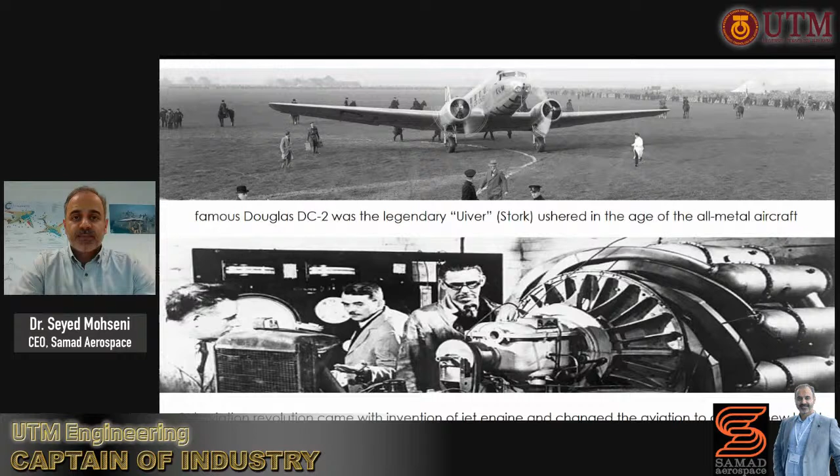The second aviation revolution enabled a lot of airlines to make use of the jet engine, or turbofan engines were installed on the passenger aircraft, and still up to this day, almost all of the passenger aircraft that we are using in the aviation industry run on gas turbine, and it's one of the key prime movers within the aviation industry. But the third aviation revolution is emerging, and it has already started to happen now with hybrid, electric, and also VTOL aircraft.

Some of the enabling technologies have allowed these products to be developed and also move into certification and manufacturing, then later on coming to the market. So there are three key technologies that have been used to allow these products to be developed. One is electric motors using permanent magnet technologies, with significantly higher power to weight ratio. Also battery technologies, with significant investment that major companies and also governments have made into the development of the new batteries.

And third are the IT and connected autonomous technologies that are allowing more advanced flight control systems and more advanced methodologies for flying an aircraft, at the same time that this is happening in the automotive industry as well. Today, I want to bring your focus on some of the underlying factors that need to be looked at if we want to see this industry flourishing. And these might not, in the first instance, look to be particularly on the product, but it's more on the environment of the future of flight.

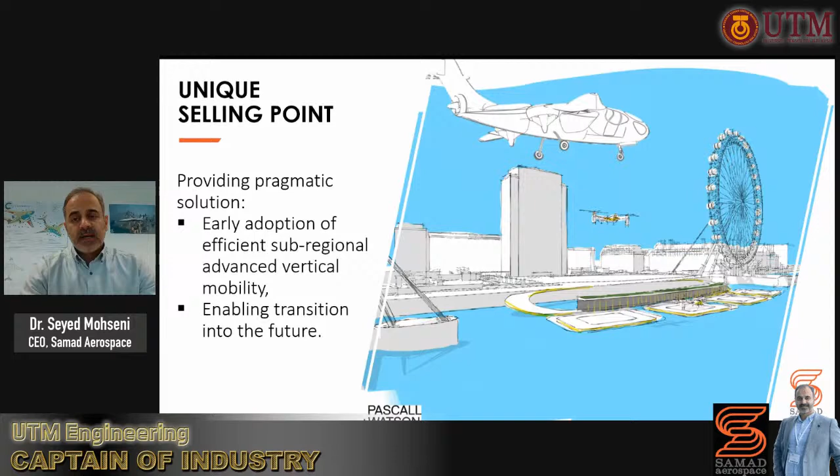In this particular topic, we are focusing on a pragmatic solution. What is the early adoption of an efficient sub-regional advanced vertical takeoff and landing aircraft? And what is the enabling transition into the future? Because we have an existing infrastructure, existing factors that all have to work together to allow the current aircraft to work. We want to bring a new type of aircraft to the market, and how would this new type of aircraft come into the aviation environment?

If we take one segment of this particular market, which is intercity transport, and this in particular is the focus of Samad Aerospace with its hybrid electric VTOL aircraft. If you think about short-haul flights, there are hundreds of flights in the countries. I'm sure in Malaysia it is the same, in the UK and different European countries. And there are a lot of flights where the duration of the flight is less than an hour, but the total time spent for that journey is more than 3 hours. And the reason is the time that we spend going to the airport and coming out of the airport.

The other point is there are certain routes that are very difficult, and there is no existing air transport that could be used by people. As an example, Cardiff to Manchester in the UK. Typically, it takes 3.5 hours of driving by car. There is no existing flight route for the 188-mile journey. The same journey can be done using the e-Starling aircraft for city-to-city transport with about half an hour to 45 minutes of flight. So significant time saving can be achieved, and therefore increased productivity for premium level travelers, which on its own can benefit the environment at large.

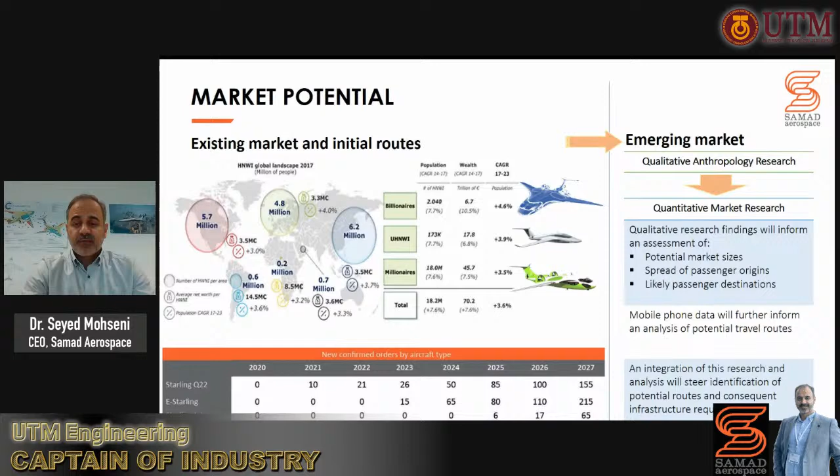That's the initial market. But the emerging market needs to be looked at, and this is again another topic where we would be interested to see how universities and other companies could get involved to provide valuable data for us. The particular data that we would be interested in is to find out where VTOL aircraft could operate currently in the countries using existing VTOL vehicles like helicopters.

What are the sub-regional airline opportunities that could be looked at here for a 5-seater aircraft? And what is the frequency of these flights? How often can we rely on the air routes? In particular, the suggested method is to look into traditional historical analysis, understanding the routes and frequency of these air routes. How can we financially make sense of using the existing routes?

And then the next step, we would be interested to look into the data that is publicly available through the CAA of different countries, so that we can find out the profile of the passengers, the type of profiles of the passengers, and also understand the originations of the journeys before they come to the airport.

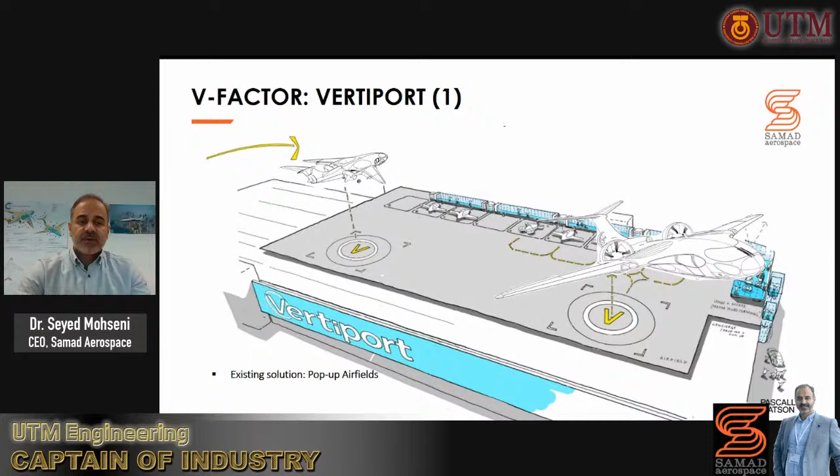Vertiports are very, very important, and the economics of vertiports are also important, because if we want to have a thriving electric VTOL air transport system, we need to have the correct infrastructure in place. And the economics of vertiports are important because there would be companies running vertiports similar to the companies running airports. And therefore, the study on how many flights would make sense for a typical size of vertiport, and where we could put these vertiports.

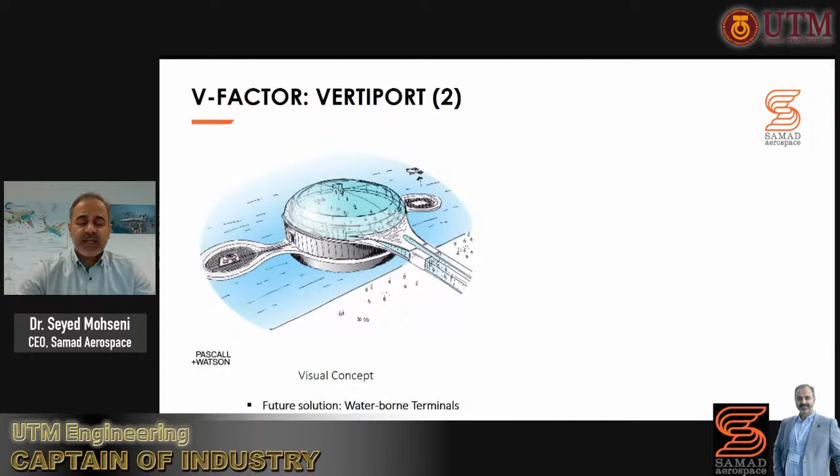We have done some conceptual work with Pascall and Watson, looking into different designs of vertiports. How can they be integrated with existing systems, how practical they would be from the planning permission side, and what are the types of vertiports that we could have based on the city or the town that we are installing the vertiports for.

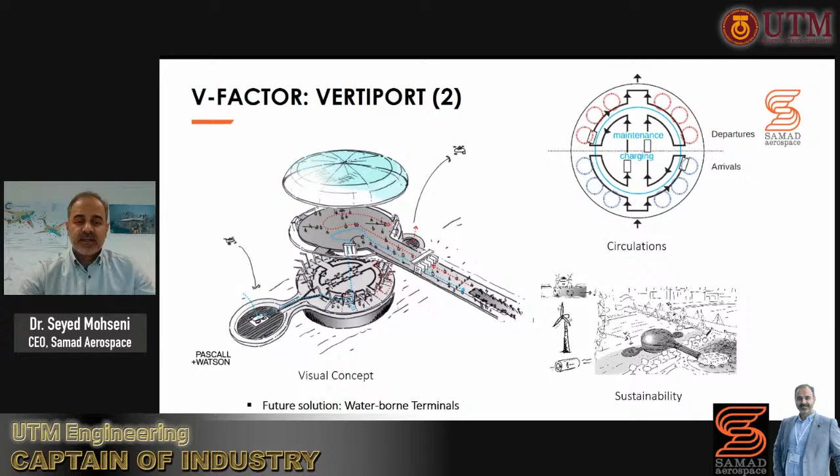Also, where the energy is coming from, which is a key factor. So we are not looking into just how the aircraft would be flying and would be charged, but how the energy of these vertiports would be supplied, and how can we use the existing renewable sources of energy to provide the required power for these vertiports.

So coming to the aircraft itself, in particular, apart from the typical development of an aircraft, which I'm sure the majority of the good universities in their aerospace and aircraft design departments know how to do, we are more interested to see how the design would affect the environment, and how can we choose a design that would match with the expectation of the communities.

So, for example, what is the downwash effect? What is the wake turbulence of this type of VTOL aircraft in relation to existing buildings and design of the vertiports? So the technical considerations are also very important. The downwash effect on the ground, and where is the level that it upsets people, and what we need to avoid. What is the threshold for loudness, and also the separation for wing-borne aircraft to VTOL aircraft.

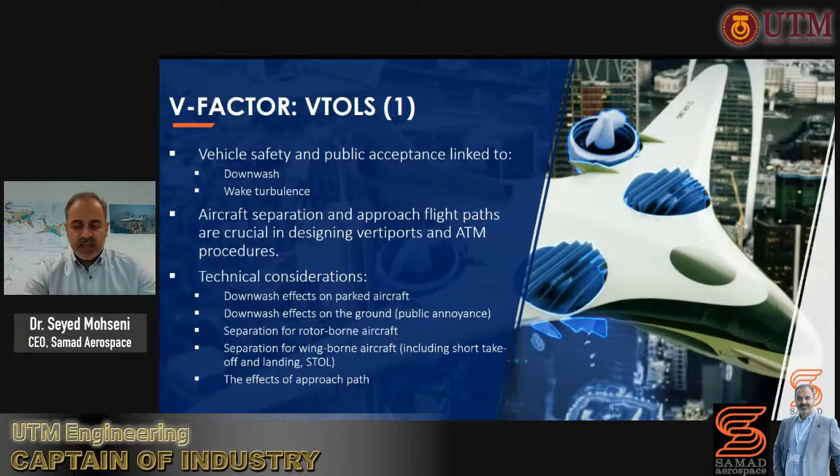So an aircraft is VTOL as long as the lifting elements are keeping the aircraft in the air. But in the process of transitioning from VTOL to CTOL when the aircraft is wing-borne, what is the effect of the noise and the aerodynamics and the emissions on the environment? This is something that we would be particularly interested in.

In Samad Aerospace, we are following the spiral method of development, a roadmap to e-Starling. So we started building the prototypes in 2018. Once we confirmed the concept, we have built various prototypes for different purposes in the path of our development. Some of these prototypes might be spin-off products to be taken to the civil UAV market as well.

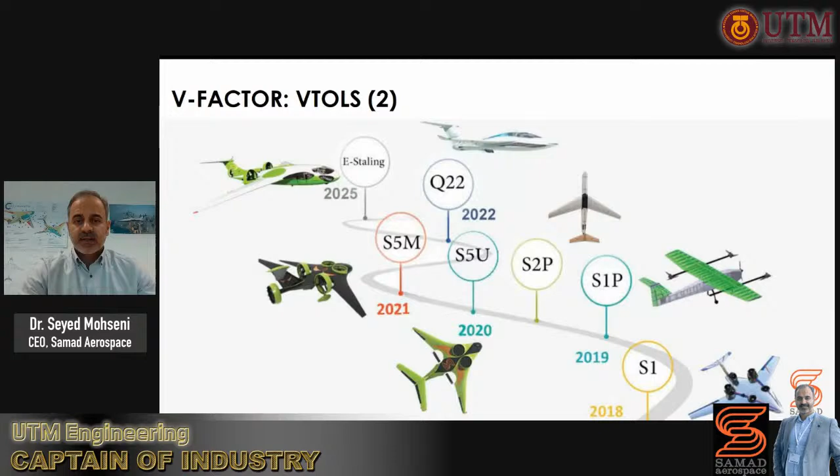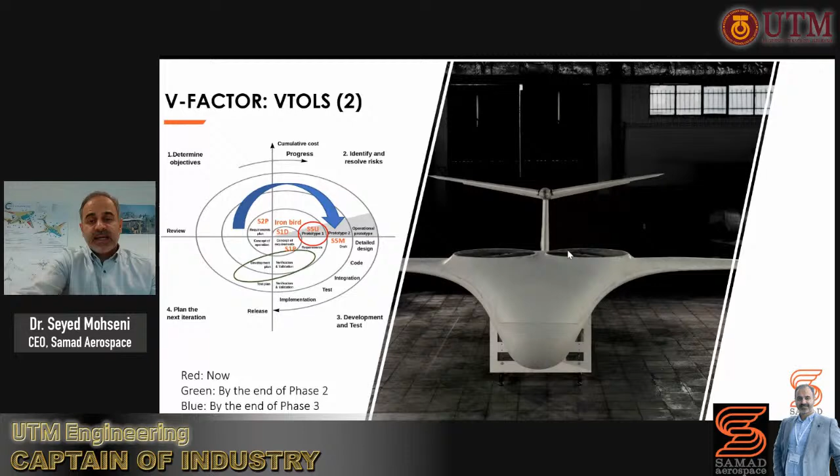So the spiral method of development is what you see on the left. We break down the complex systems into smaller packages of technology blocks. We build smaller, simpler prototypes. We test them. Once we confirm, we add the complexity and we turn around. So where we are currently is the red circle that you see, S5U, and the aircraft that you see on the right. This is towards the end stages of the half-scale prototype of e-Starling.

This would be unmanned, and it's not publicly available yet. But this is the first event where I'm announcing the last stages of the build for the S5U, the half-scale prototype of e-Starling. It's an all-composite airframe with all-electric propulsion. Obviously, for the purpose of the demonstration and the test, we don't need long range, and therefore all-electric is possible for this aircraft.

The other important factor for the future of the Third Aviation Revolution is the charging infrastructure, because it's not about charging of the aircraft, it's about availability of the power at the point where it is required. So if you take a typical electric aircraft that has a battery pack of 100 kilowatt hours, the 100 kilowatt hour battery would require very fast charging, because if you put a typical 50 kilowatt charger on it, it would take 2 hours to charge that battery.

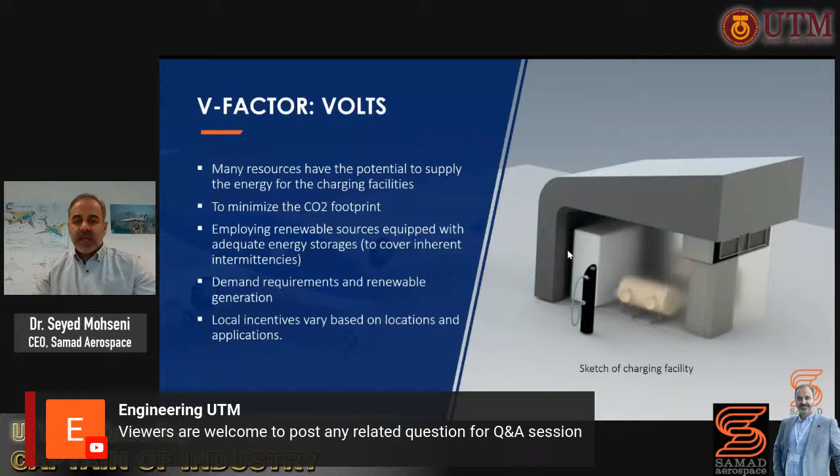So where is the power going to come from? Because if a particular road has been designed to have a 2 megawatt power cable, and we suddenly demand 3 megawatts from it, how is the power going to be transferred, where is it going to be produced, and if it's going to be produced via coal or another fossil fuel, what is the point of having electric aircraft when the source of electricity is fossil fuel? So the charging subject is looking into how the aircraft would be charged economically, but at the same time, how this charging would benefit the environment at large.

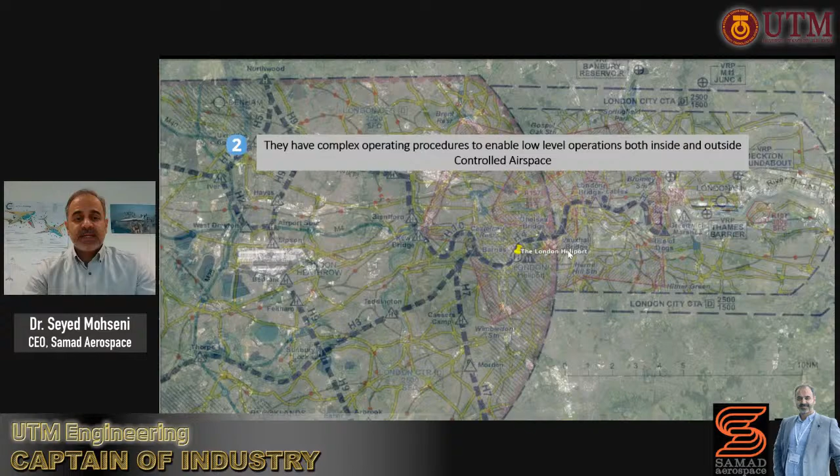The matter of air traffic management is very, very important, because there are existing helicopter routes that we would be using for e-Starling at the moment, and also any other intercity aircraft would be using existing helicopter routes, but these routes are limited. And at the same time, these aircraft would not stay helicopter. After a few minutes, they become an aircraft in the class of general aviation type aircraft. So that's a different level of air traffic management system.

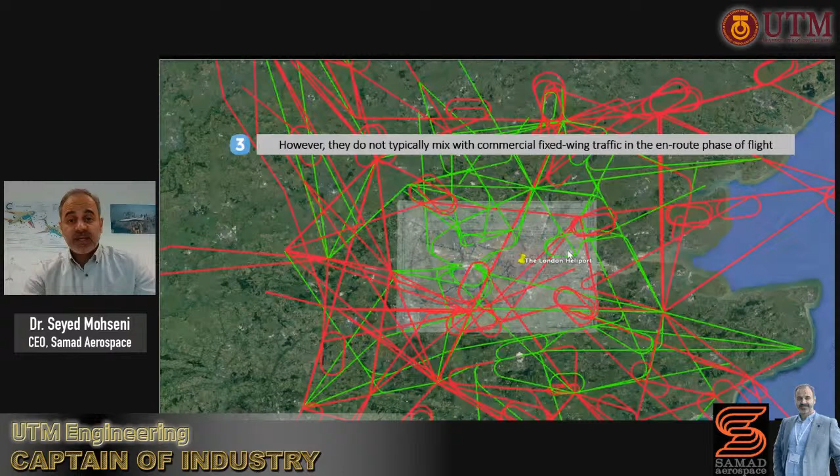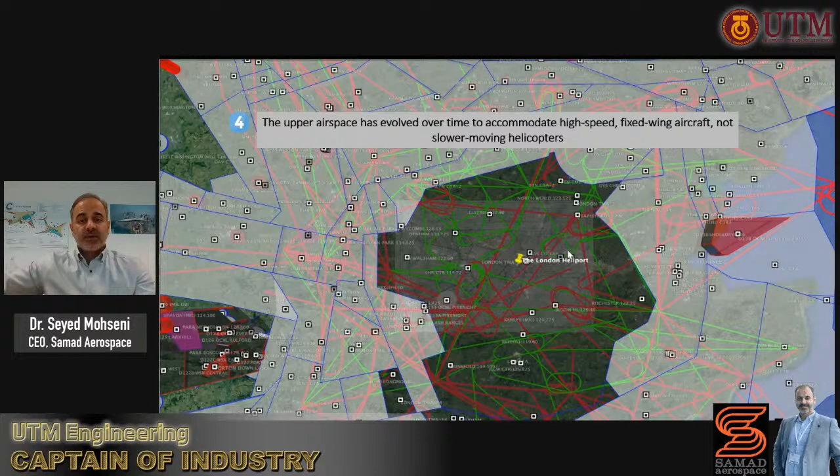And for some of the other aircraft, similar to our Starling Jet, where it needs to go into international routes, then it's another level that needs to be overlaid. So now we have an aircraft that would fly in the beginning similar to a helicopter, then it goes to the general aviation environment, then it goes to the higher altitude level for international transport. So the subject of management of these is of importance, and as it's been suggested in the CONOPS report of NASA and FAA, most probably in the beginning these aircraft would be using existing transport systems.

Apart from that, we also want to maximize the utilization of existing airfields. There are hundreds of airfields throughout the UK and probably thousands throughout Europe and the world that are underutilized. So in the beginning, we would be interested to look into optimization of the routes through the existing airfields and in connection with the existing air transport systems.

So let me just check my timing.

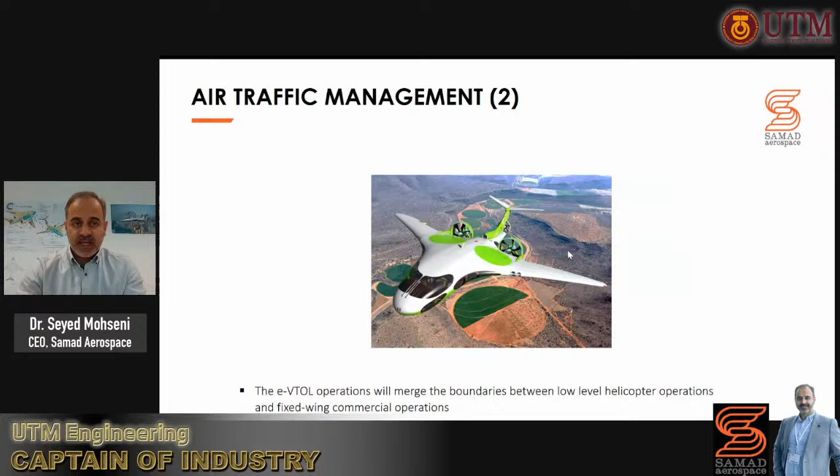Okay, yeah, that's good. So as I said earlier, this aircraft, e-Starling, is mixing the helicopter routes with also having the international routes of flight as well. And this needs to be looked at in that environment.

The other subject that would be of interest for us, and as I said, these are the factors to enable the third aviation revolution to flourish: we must look into integration of this type of air transport method with the existing transport systems. And if it's not fitting the existing transport systems, then it's not going to flourish, it's not going to expand in its use. Again, one of our partners, Pascall and Watson, have been looking at how the vertiports could be integrated with the current systems.

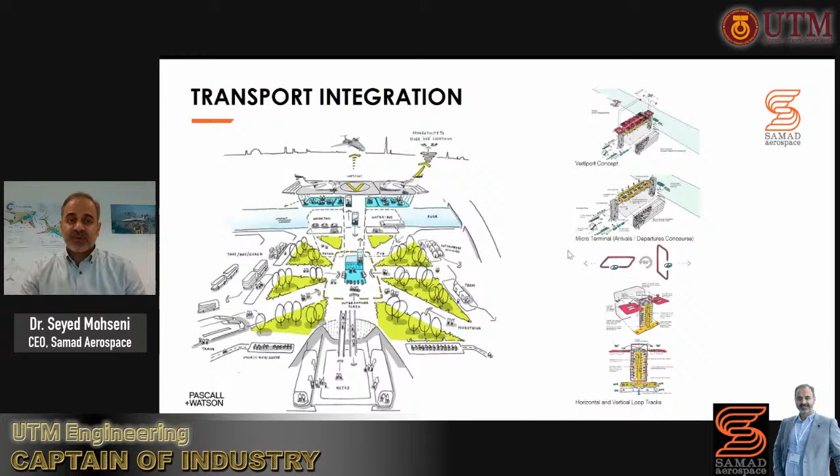For example, looking into design of vertiports above the train stations as the hub of transport, or even looking at a maybe riskier approach. How could we have vertiports above petrol stations, even for a single use of VTOL aircraft, and optimizing the use of the aircraft with the frequency of the passengers traveling in these hubs.

And finally, the passenger experience. How can we make sure in today's environment, where people are demanding, rightly, ease of use of services, that this new service is a very easy and seamless experience for people? So we have been looking at integrating the intercity transport with existing ride-hailing services, where an individual would decide to go from A to B. They put their final destination in their existing Uber or Grab or any other ride-hailing service, and then Grab would be working with an existing operator who would make use of the VTOL service.

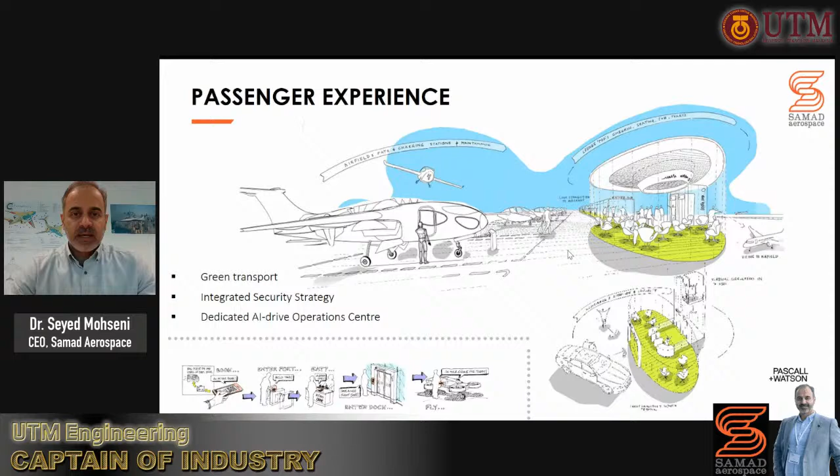So the car would come, pick up the passenger, and take them to the vertiport. In the vertiport, the aircraft is ready to take them to the next vertiport near the destination. And just before the aircraft is going to arrive, the Uber taxi or Grab car would be ready to take the passenger to their final destination. And how can we make sure that this would give them a very comfortable experience to allow an increased number of people joining this service?

So in summary, enabling the third aviation revolution requires strategic thinking into four main pillars: aircraft systems and the technology, which is probably the core part of it. Then looking into certification of these type of aircraft, mainly through EASA and FAA and probably through civil aviation authorities of other major economies.

The social acceptance, understanding what would benefit the society and community so that the society will welcome this change in the transport system, and also the infrastructure required to allow a larger number of aircraft coming to this use. So all of these have to come together to allow the third aviation revolution to become a reality, and it obviously has to satisfy the requirements of these four pillars above.

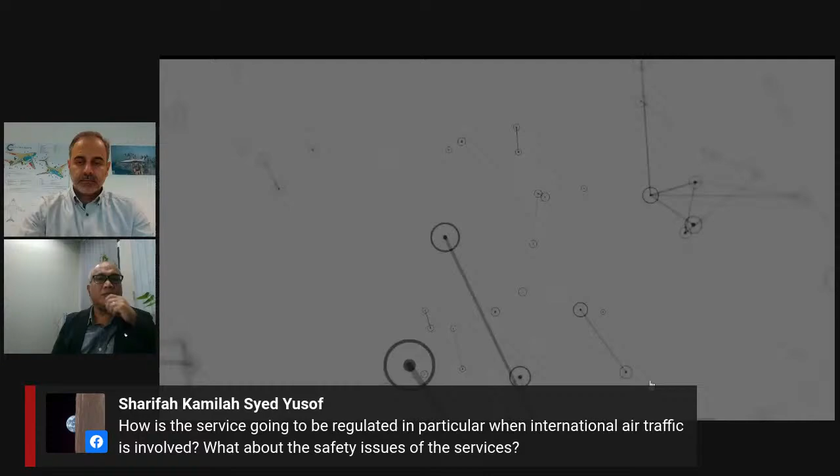Thank you, Dr. Seyed. Can we take one question from Sharifah Kamilah Syed Yusof? How is the service going to be regulated, in particular when international air traffic is involved? And what about the safety issues of the services?

Absolutely. When it comes to international transport, currently the service that is available is for business jets. So if an aircraft is going to go through international routes, it has to use the existing routes that business jets are currently using, and has to reach that level of altitude to fly them. General aviation for some regional flights is also possible. So we are not trying to create totally new air transport routes.

We would be utilizing the existing ones, and as the number increases, we would look into how we can increase the capacity of existing infrastructure, and then at some point move towards 4D air traffic control systems, where significantly more aircraft could fly in the environment. So we have to deal with the regulatory bodies in order to secure the security and safety of the flight and the community, right?

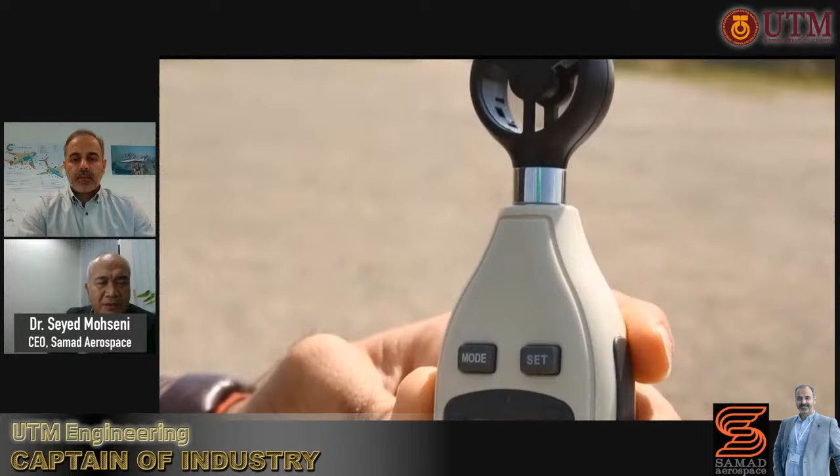SIP stands for what, Dr. Seyed? S1P, I mean, S for Starling, 1P is because this is a 10% prototype. It will have its commercial name in future, and the final product would look slightly different, but the configuration is pretty much the same.

The purpose of this is to provide the data that we require for the flight control system, and at the same time to be a very cost-effective aircraft to be used for our type of customers. So we are not trying to increase the luxury element of it. Yep.

So it's going through the transition now. Now it becomes an aircraft. Once it becomes an aircraft, then we don't need the other rotors, the VTOL rotors, the lifting ones. They would stop working. Landing, yeah.

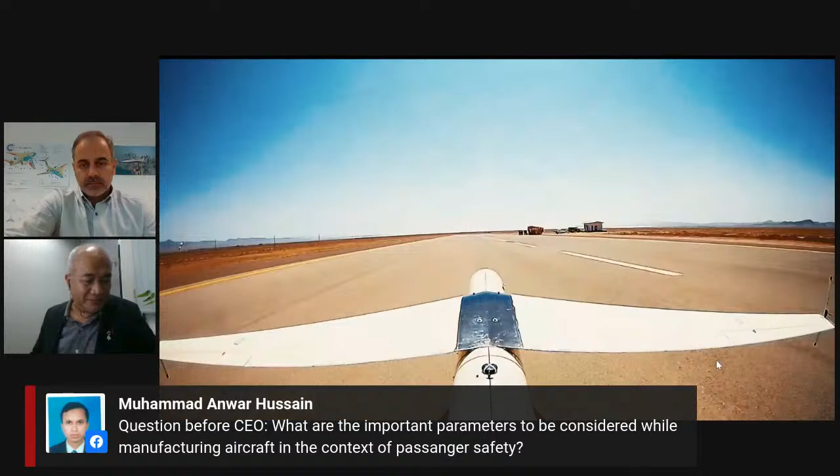We have one more question, Dr. Seyed, from Muhammad Anwar Hussain. What are the important parameters to be considered while manufacturing aircraft in the context of passenger safety? I mean, when it comes to passenger aircraft, there are a large number of aspects that we need to look at, and one of the significant achievements of the manufacturers during the last, I would say, 40 years

is the phenomenal level of safety that has been achieved for passenger aircraft. And whilst this is very good, and it has been an evolutionary process to increase the safety level, it has raised the bar of standard for new developments of passenger aircraft, and therefore for us, as a new startup company similar to other startup companies in the US and Germany, we need to work a lot to be able to reach the standard requirements for the aircraft.